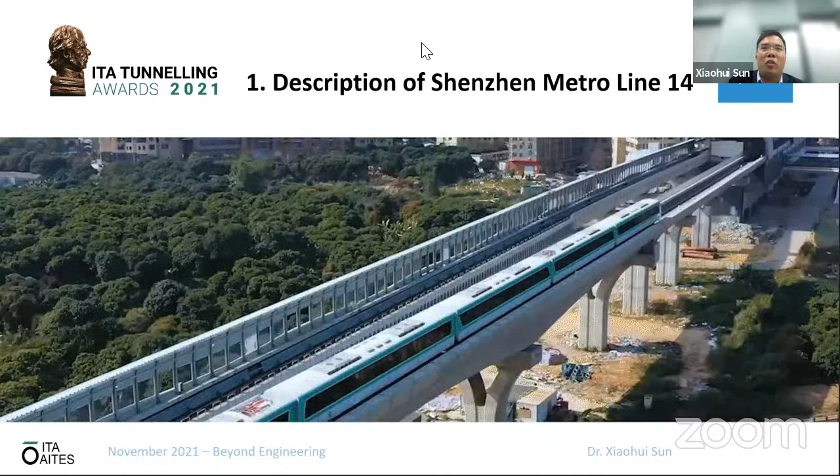First, I'm going to describe Shenzhen Metro Line 14 a little bit. The metro system has become an inevitable choice for megacities like Shenzhen because of its huge transportation capacity and the advantage of not occupying surface space. In recent years, more than 100 shield machines have been employed annually in Shenzhen.

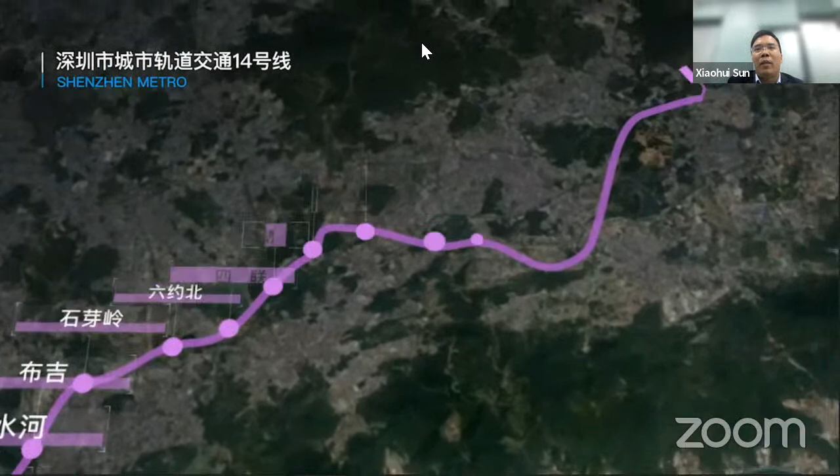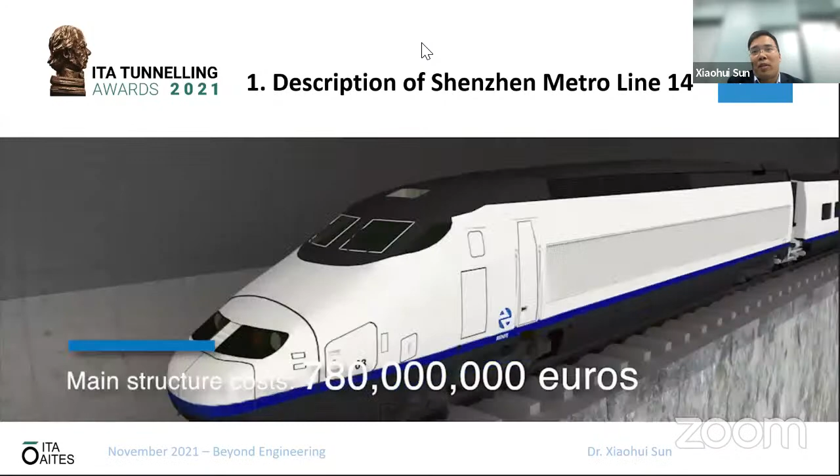Among the metro lines under construction, Shenzhen Metro Line 14, with a total length of 50 kilometers, is a benchmark project for green and low carbon construction in Shenzhen. In total, 49 shield machines have been used in the construction of the 88 kilometers of tunnel. New technologies have been put into use for green construction. Of course, shield spoil was processed by a novel treatment system, realizing volume reduction and resource utilization.

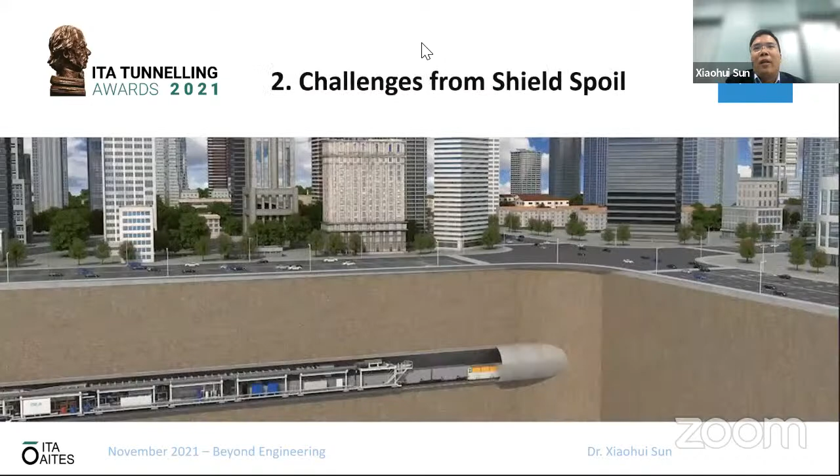And I'm going to show you the challenges from the shield spoil. So what is shield spoil? In shield tunneling, soil is cut and stirred by the shield machine, and by adding foam agent and water, it turns into shield spoil with very high moisture content and poor properties.

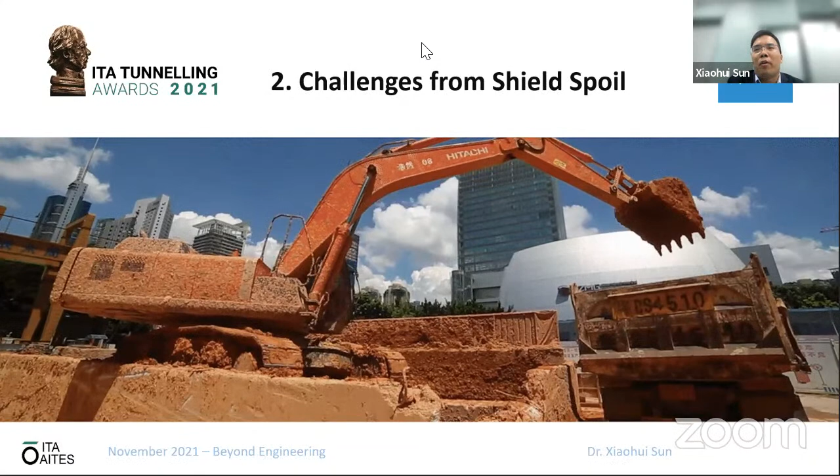The total amount of shield spoil generated in the construction of Metro Line 14 is estimated at 5 million cubic meters. In the past, shield spoil was transported by special vehicles for dumping. This traditional way not only occupies land resources, but also causes many problems, such as high cost, landslide risks, traffic jams, etc.

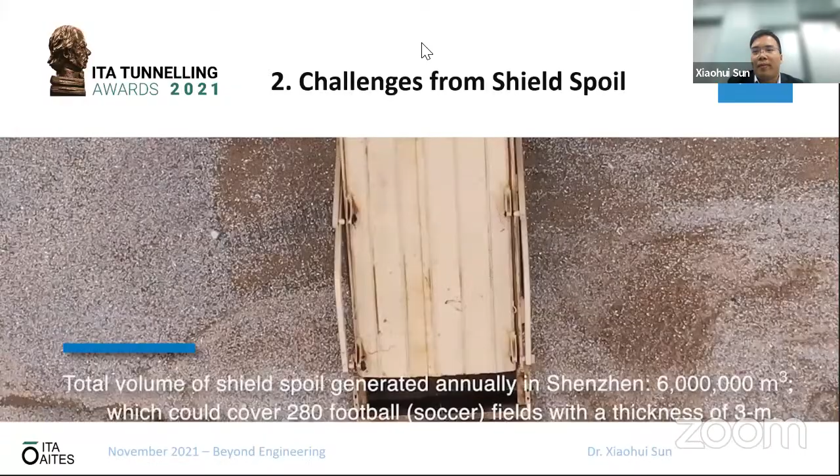Moreover, there's no more land in Shenzhen for dumping this shield spoil. On the other hand, shield spoil is mainly composed of gravel, sand, clay, and water, which are all valuable resources in engineering, and obviously dumping is a waste of natural resources. However, there are several major challenges in the resource utilization of shield spoil.

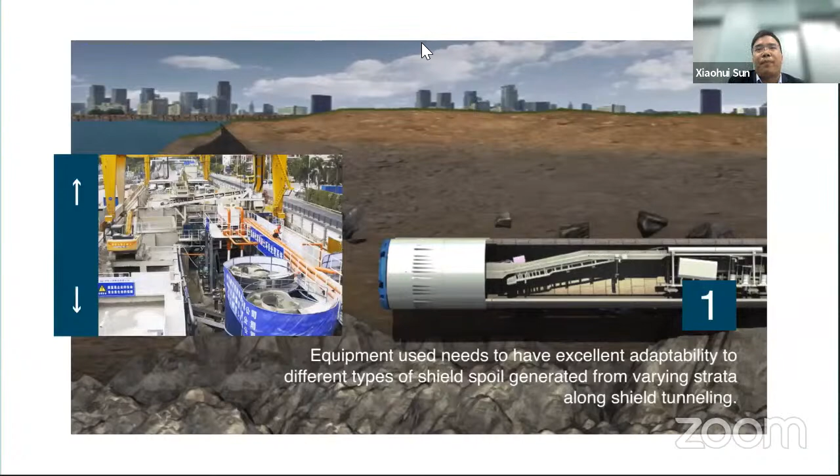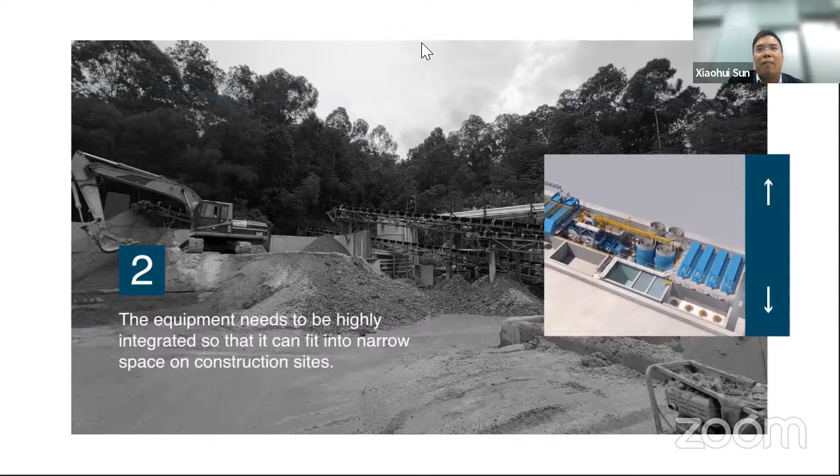First, the equipment needs to be adaptable to different types of shield spoil that come from different strata. Second, the equipment needs to be highly integrated so that it can fit into very narrow spaces in this megacity. Third, the equipment needs to be intelligent and advanced — the traditional control method requires a lot of manpower and is not very efficient. Therefore, we came up with a novel solution.

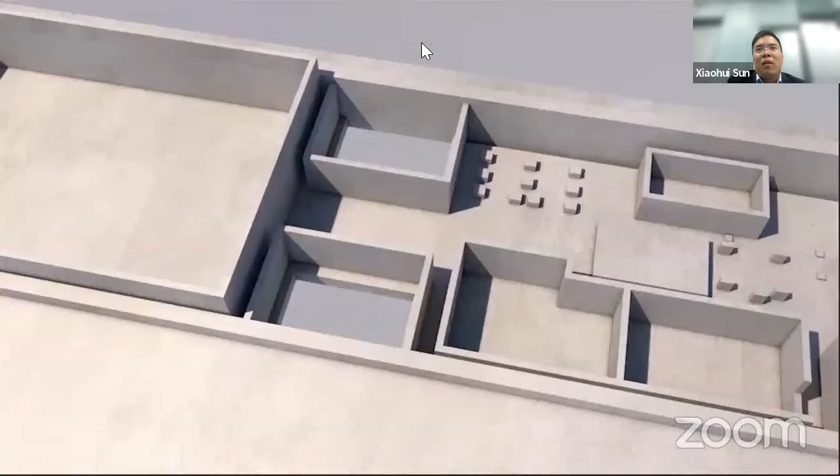An intelligent and modular system was developed and employed to overcome these challenges. This is a view of our system. It consists of 4 major modules, including a vibration sieve module, sand washing module, flocculation module, and filter press module, and an intelligent control system. As you can see, this is a 4-in-1 intelligent system.

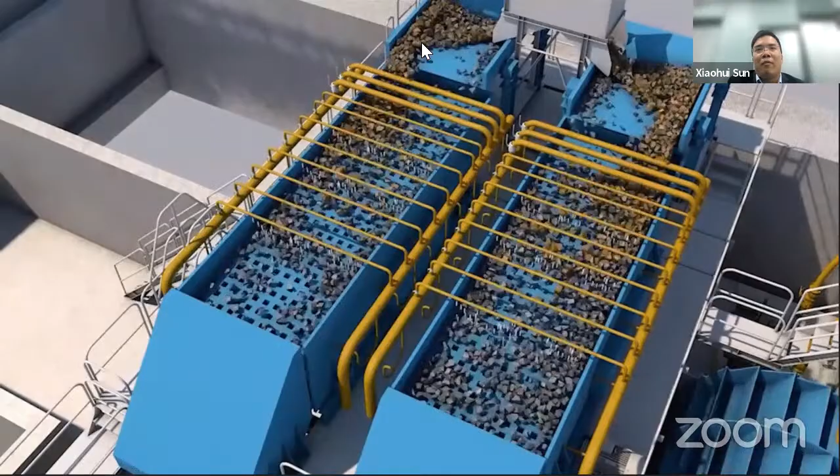In the equipment, the vibratory sieve module separates aggregates with a diameter larger than 2 millimeters from the shield spoil. The frequency of the vibration sieve and the pressure of the water flusher can be easily adjusted by the intelligent control system to ensure the capability of the equipment in treating different types of shield spoils.

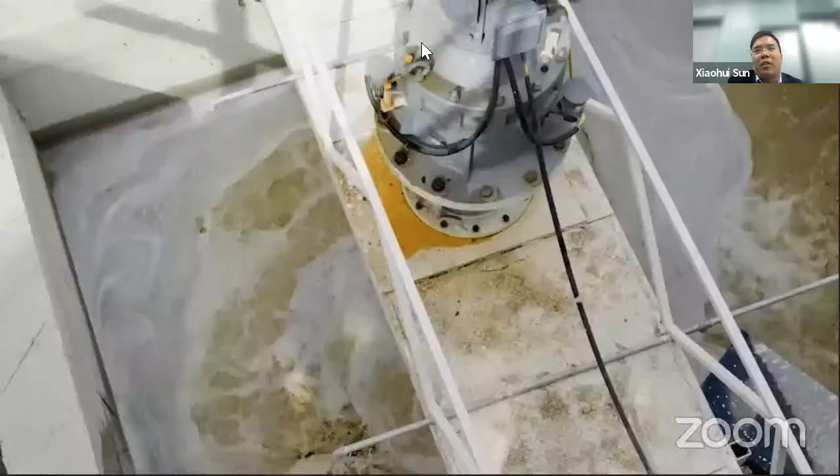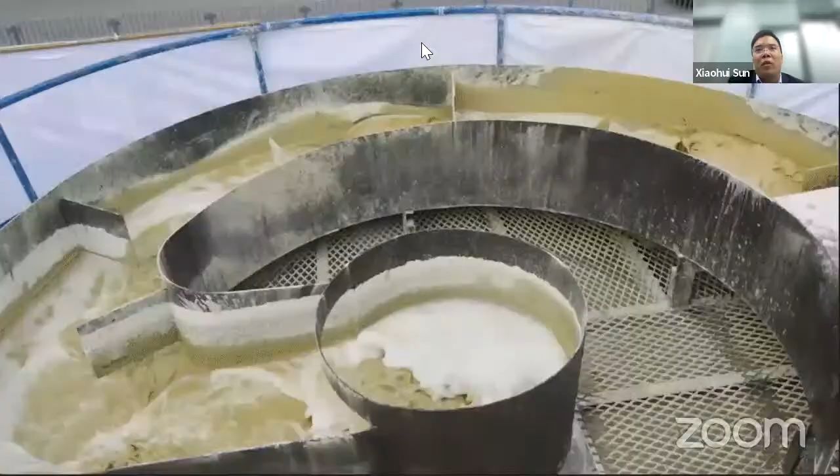The sand washing module recycles sand with a diameter ranging from 0.075 to 2 millimeters, and the flow rate of the hydrocyclone and the rotational speed of the sand washing system can also be adjusted by the intelligent control system. The specially designed flocculation module concentrates the slurry from the previous steps.

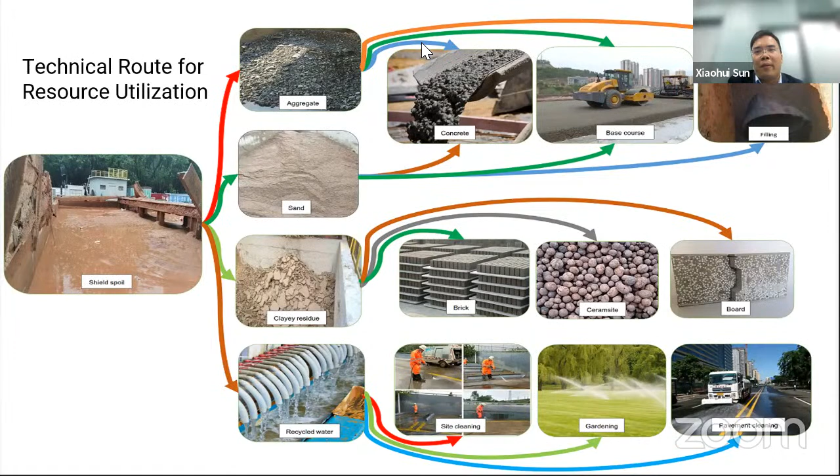In the treatment flow, 4 types of materials, including aggregate, sand, clay residue, and water, are recycled separately as products from the shield spoil. The technical route for the utilization of these 4 types of products has been well designed. Here I'm showing you their technical route.

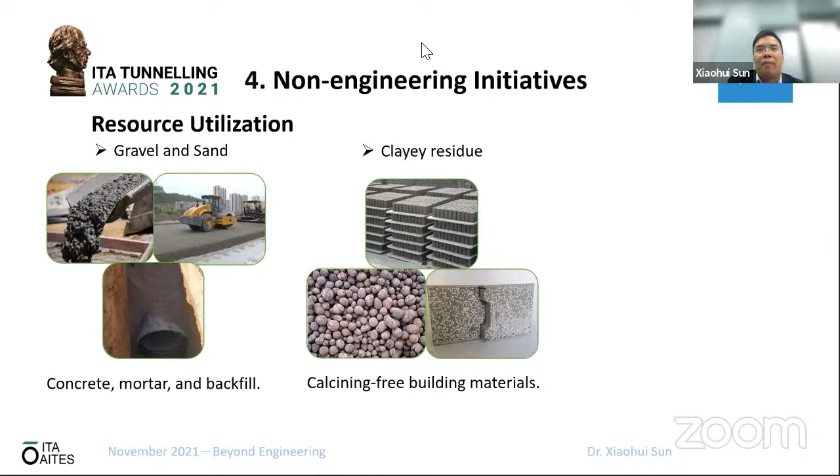The recycled coarse and fine aggregate can be used for making concrete, mortar, and backfill or grout, on-site or off-site. The clay residue is aggregate-free and can be used for making different types of building materials, such as blocks, bricks, and so on. The recycled water can be collected and used for site cleaning, vehicle cleaning, and gardening purposes.

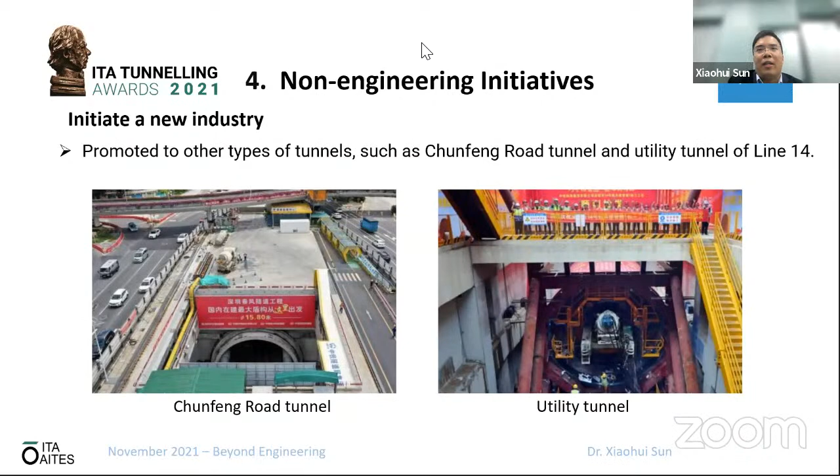This solution has also been used in other types of tunnels, such as road tunnels and utility tunnels in the city. A group of supporting technologies and guidelines for the smooth operation of the equipment have been developed. This effort lays a sound foundation for the rise of a new industry related to the treatment of shield spoil.

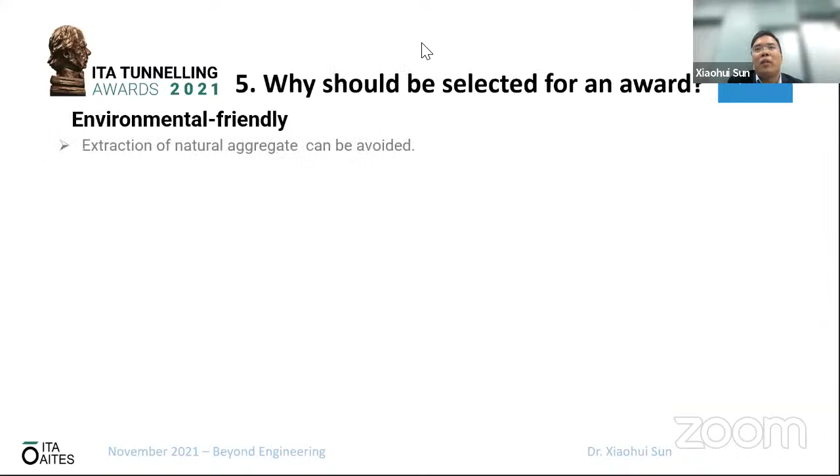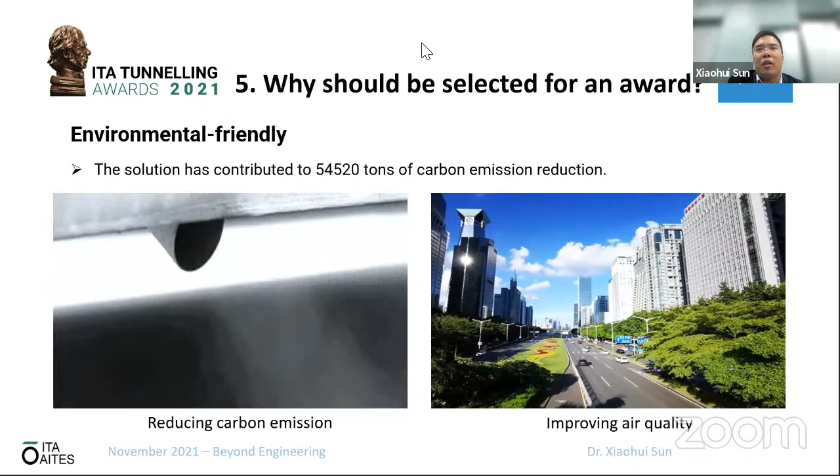Fifth, why should we be selected as an award? First, this solution has delivered an efficient, sustainable, and low carbon way of disposal of shield spoil. The extraction of recycled aggregate from the shield spoil significantly reduces the need for natural aggregate in construction. It also lowers the usage of traditional special vehicles, which substantially contributes to the reduction of energy consumption and carbon emission in the construction process of tunnels.

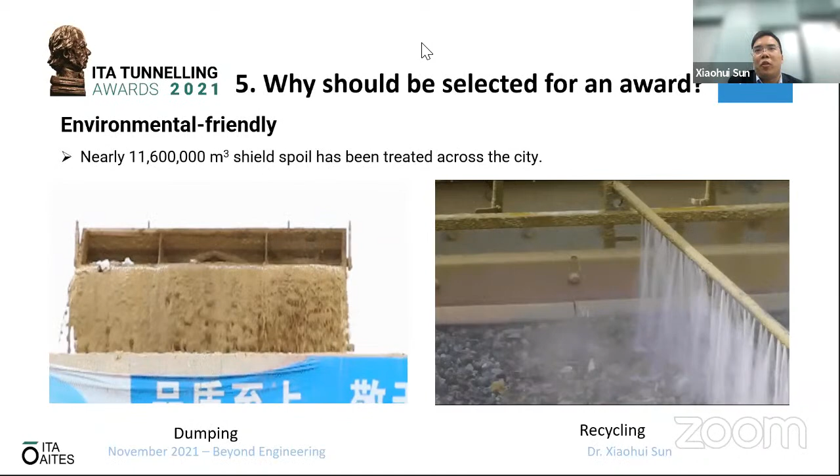This solution has contributed to 54,000 tons of carbon emission reduction and saved 1.93 square kilometers of land. The traditional way of disposing shield spoil has been changed profoundly in Shenzhen. Nearly 11.6 million cubic meters of shield spoil has been treated across the city, reducing half of the dumping volume and obtaining 4.6 million cubic meters of recycled aggregate and sand.

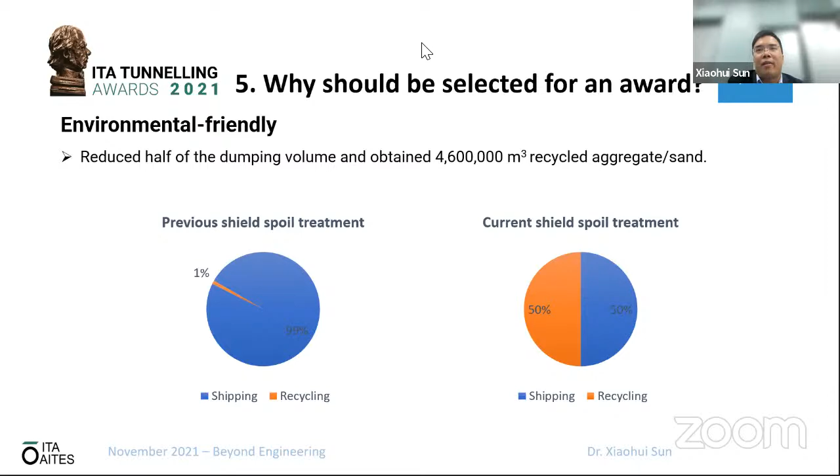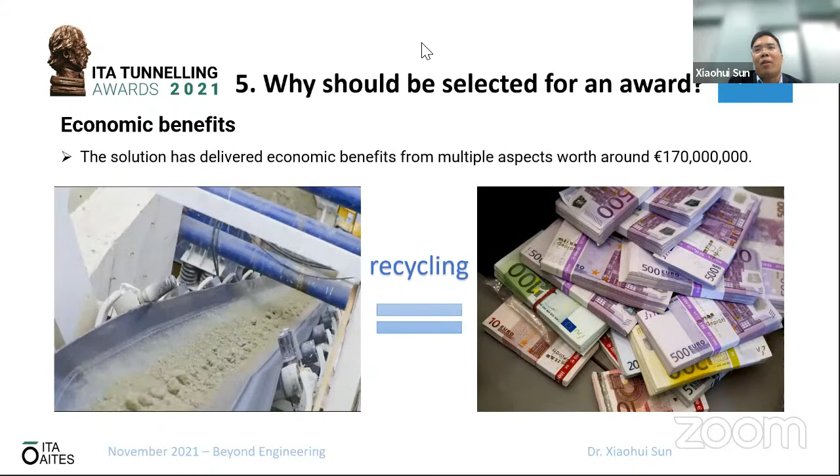The implementation of this solution also contributes to a total water conservation of 1.16 million tons. So overall, the solution has delivered economic benefits from multiple aspects, worth around 170 million euros. The outcome delivered by this solution has been welcomed by the clients and communities.

The chance of delay in construction schedule related to the shipping of shield spoil, which was very common before applying this solution, has been eliminated, and the project was completed on schedule. Also, using fewer special vehicles benefits the communities surrounding the metro construction site because of lower traffic pressure, reduced traffic noise, and higher air quality. So we produced a very good neighborhood environment.

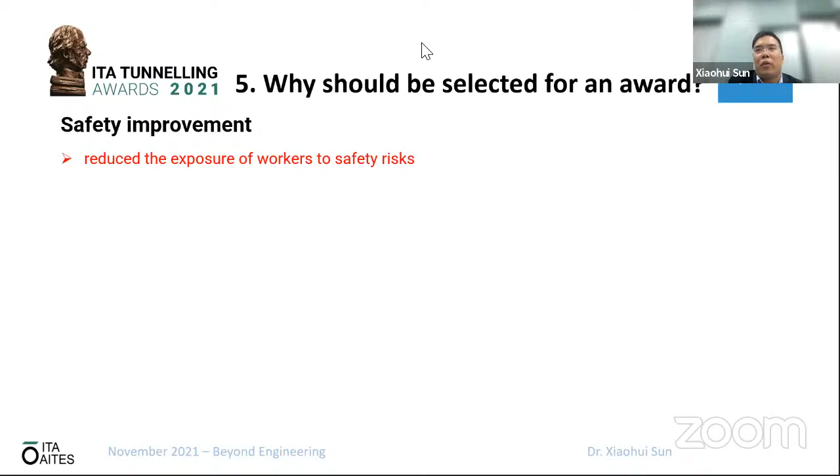In the construction of Shenzhen Metro Line 14, the application of this solution and other new technologies has reduced the exposure of workers to risks. For instance, innovative belt conveyor system, prefabricated components, intelligent control system, VR training system, and face recognition security system.

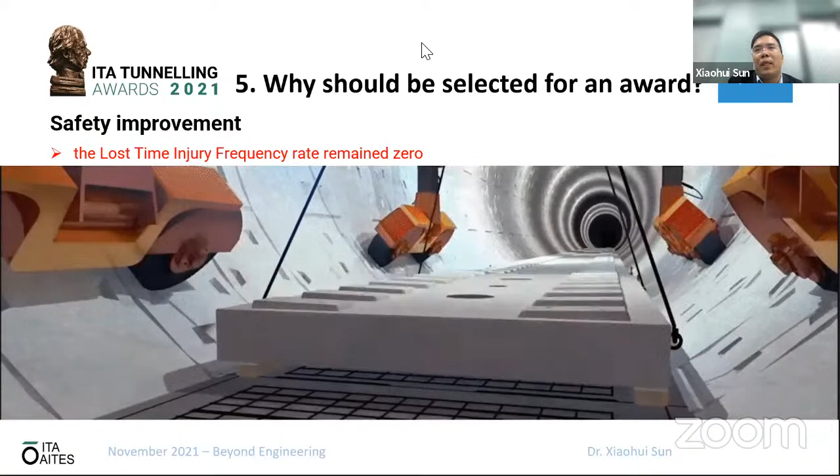Due to the implementation of all these technologies regarding safety improvement, the lost time injury frequency rate remained 0 during the whole duration of the construction.

Thank you for your attention. Here is all my presentation. Thank you.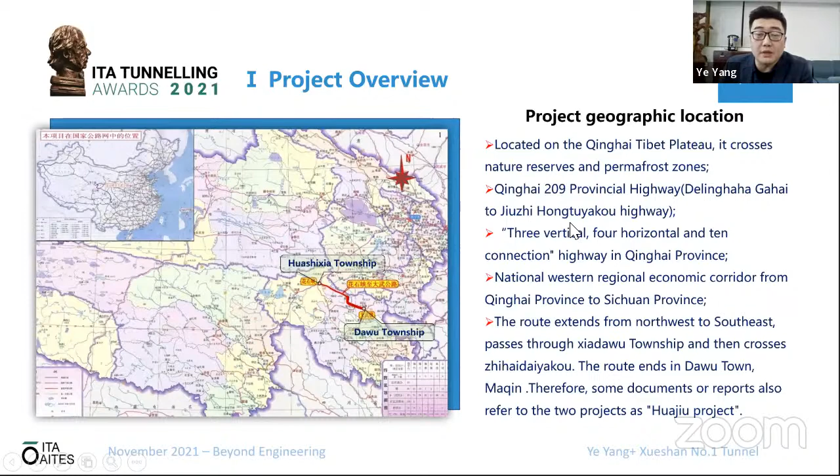The project is located on the hinterland of the Qinghai-Tibet Plateau. It crosses natural reserves and permafrost zones. The length of the tunnel: the left line is 4,570 meters, and the right line is 4,495 meters.

The Xueshan #1 tunnel crosses a mountain range with an altitude of 4,816 meters. This is some figures of the tunnel.

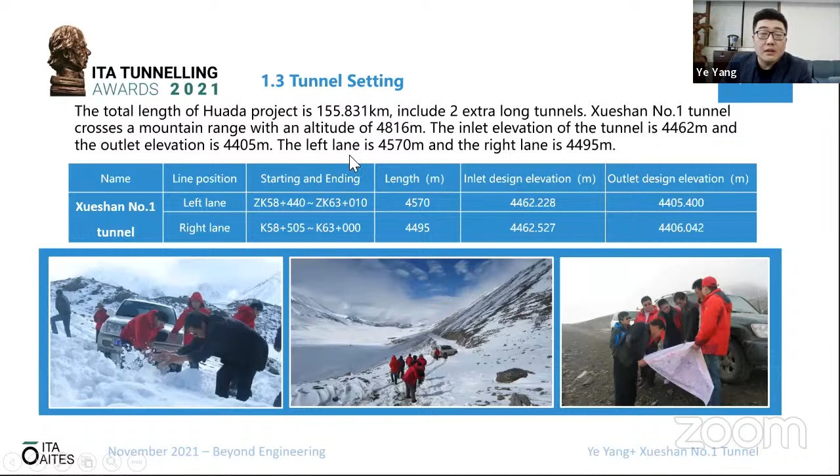The construction clearance width is about 10.25 meters, and the height is 5 meters. The emergency parking zone width is 13 meters and height is 5 meters.

Xueshan #1 tunnel is a tunnel in a high altitude, extreme cold area. For tunnels in this area, waterproofing is the fundamental goal of what we have achieved, and drainage and thermal insulation are the key points.

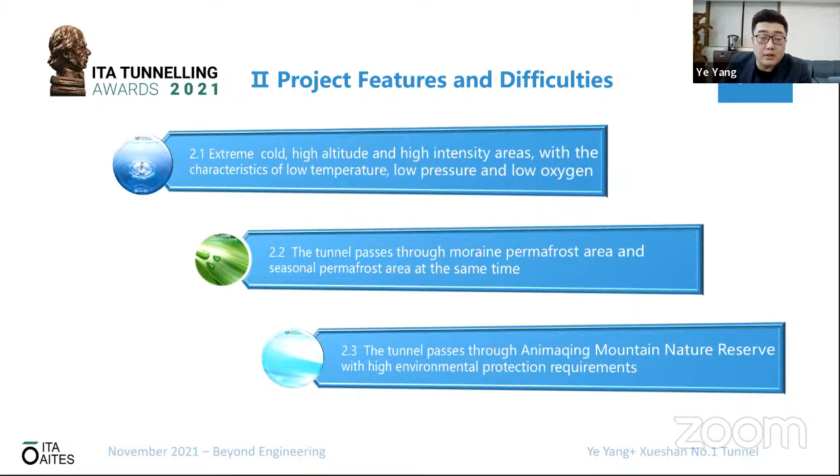The entrance section of Xueshan #1 tunnel is located in the permafrost area of moraine. The permafrost shall be protected during construction and after completion of the project. The annual average temperature in that area is below -4 degrees Celsius, and the extreme minimum temperature is -48 degrees Celsius, which is very distressing.

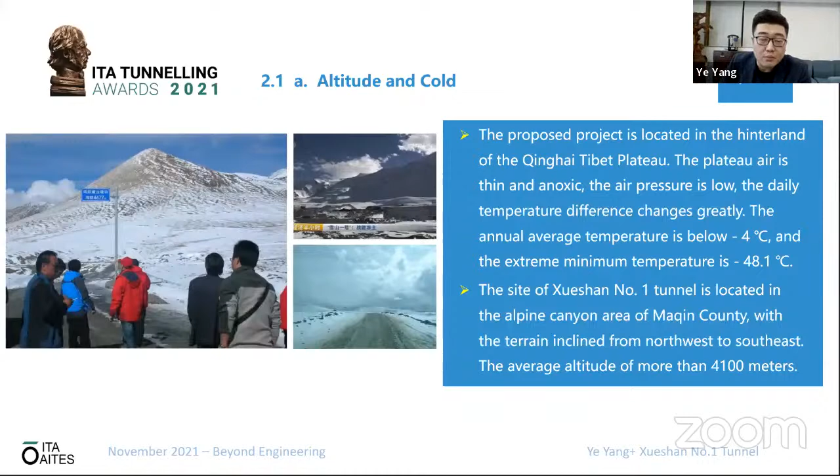The seismic activity in the area is relatively frequent, and earthquakes have occurred many times near the tunnel site.

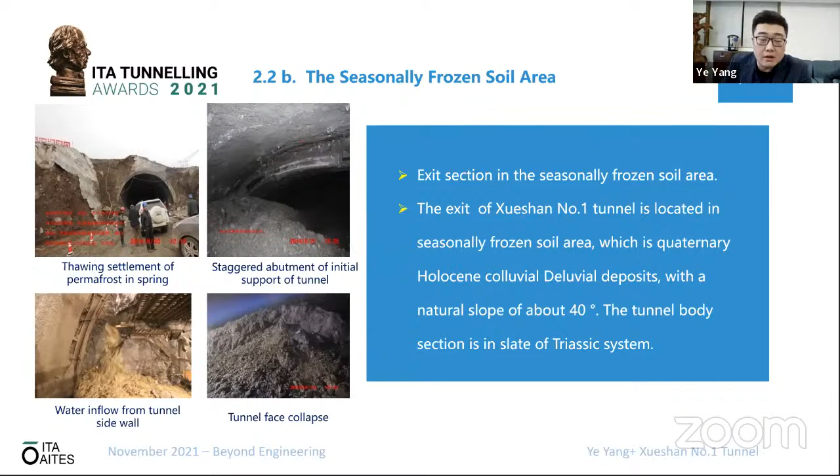According to the New Austrian Tunneling Method, the initial support structure of the tunnel is usually supported by anchor bolt, a reinforcement mesh, and shotcrete.

However, the primary task of building a tunnel in the permafrost layer of the moraine is to protect the frozen soil. The setting of system anchor bolts will damage the frozen soil, induce a deep thawing circle, and cause thawing settlement of the frozen soil. It is not conducive to the stability of surrounding rock, and therefore the system anchor bolts are cancelled in the design to strengthen support.

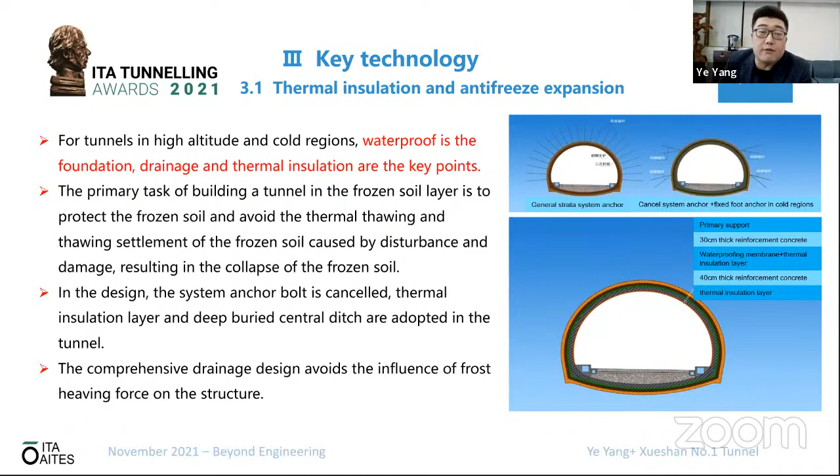In order to prevent the thawing settlement and frost heave of permafrost from affecting the safety of the tertiary lining structure, the tertiary lining structure shall be constructed after the secondary lining has completed at least one winter period.

The new lining structure design we have invented is the initial support without the system anchor rod, plus the secondary lining with the geotextile and waterproof board insulation layer, and then we add the tertiary lining without the insulation layer and the geotextile.

The waterproof and drainage design: the water must be controlled before freezing. The geotextile and the EVA waterproof board are used in the design. All construction joints and settlement joints shall be provided with embedded rubber water stops. High efficiency composite waterproof agent and additives shall be added to the lining concrete to improve the self-waterproof grade of the structure.

A 500 circular drainage pipe and deep buried central ditch, and the new cold-proof water release tunnel are formed to ensure the seepage water of surrounding rock can be discharged smoothly into the tunnel.

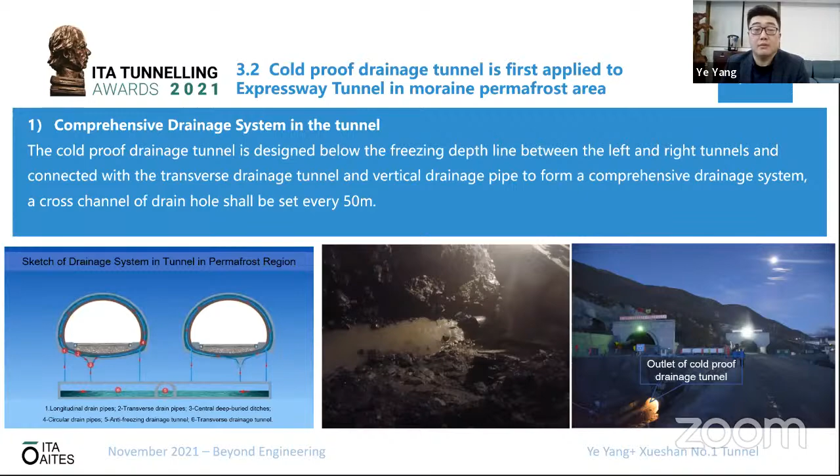Combined with the topography of the tunnel entrance within 500 meters of the permafrost entrance section of the moraine, the cold-proof drainage tunnel is set below the freezing depth line between the left and right tunnels, connected with the transverse drainage tunnel and the vertical drainage pipe to form a comprehensive drainage system. After 3 years of operation, the cold-proof drainage tunnel has strong comprehensive drainage capacity.

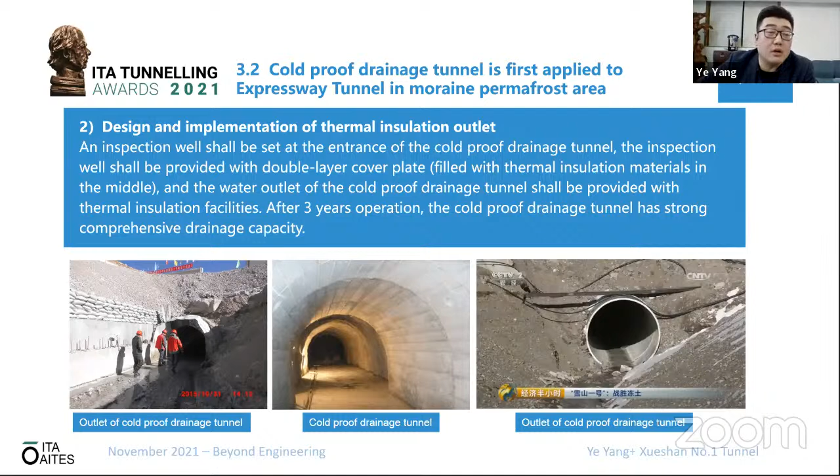The highway tunnel design standard specifies that the setting spacing of pedestrian cross passages should be 250 meters, not more than 350 meters. In case of fire in an ultra high altitude tunnel, personnel with altitude reaction, if feeling nauseous or having a headache in the tunnel, shall be transferred to the adjacent tunnel through the nearest cross passage. Therefore, the reasonable cross passage spacing is the most effective measure to strive for escape time.

The fire model adopts a rapid development fire model. Detection points are arranged every 25 meters along the whole length of the tunnel to monitor parameters such as the temperature and visibility in the tunnel.

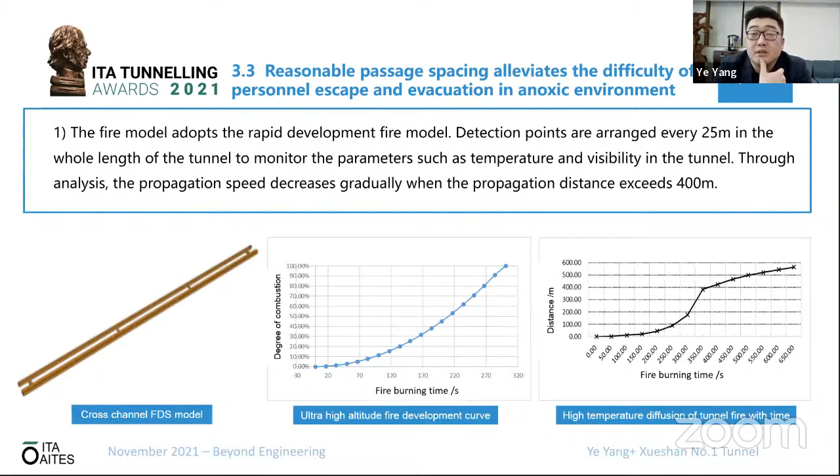The tunnel adopts automatic stepless dimming control technology to achieve on-demand lighting according to the time, speed, traffic volume, and other information, so as to save lighting power under the condition of driving safety. It also improves the insulation and capacity reduction technology of tunnel electrical switchgear, transformers and other equipment.

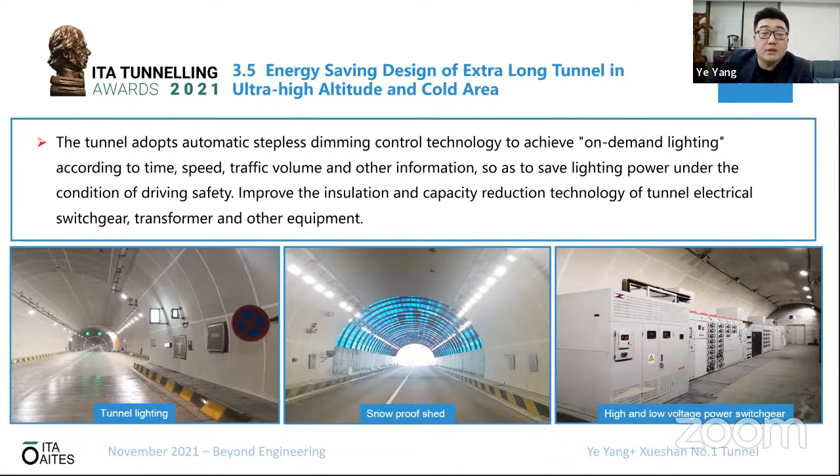The heat preservation control technology is used in the tunnel, and we use a heating device at the tunnel portal, with spacing controlled at 6 meters, which can ensure the shed temperature reaches 5 degrees Celsius required by construction. If the temperature is too low, the concrete will peel off from the shed, and that's why we make the temperature reach 5 degrees Celsius.

No safety accidents occurred in the whole construction process of Xueshan No. 1 tunnel, and zero casualties were achieved in the construction of this super long tunnel in ultra high altitude and extreme cold area.

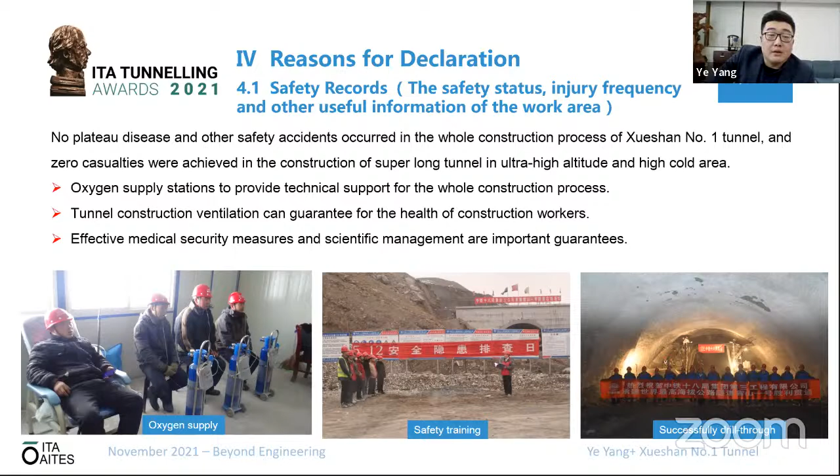It is an important part of the planned National Western Regional Economic Corridor. It has very important practical and historical significance for promoting the economic development of Qinghai province and improving regional traffic conditions. The driving time was shortened by nearly 5 hours.

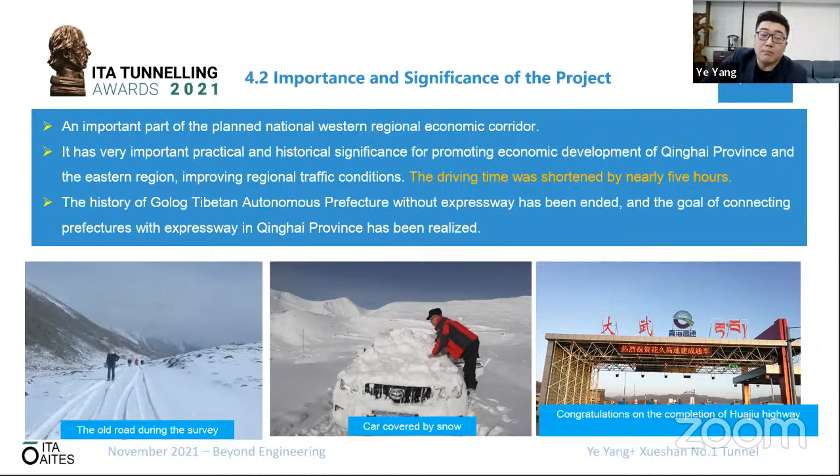The entry should be selected for an award after many scheme demonstrations and technical innovations. Many technical problems of tunnel construction in moraine permafrost, ultra high altitude and cold areas have been successfully solved, which provides a good reference for similar projects in the future.

And the new lining structure, canceling the primary support of system anchor bolt plus the primary framework lining, and then the secondary lining and the tertiary lining, is designed for permafrost surrounding rock, which can make the stability of the rock more stable. And the new cold-proof drainage tunnel suitable for tunnels in the permafrost area is invented.

Here are some rewards and the prize of provincial and ministerial excellent design award.

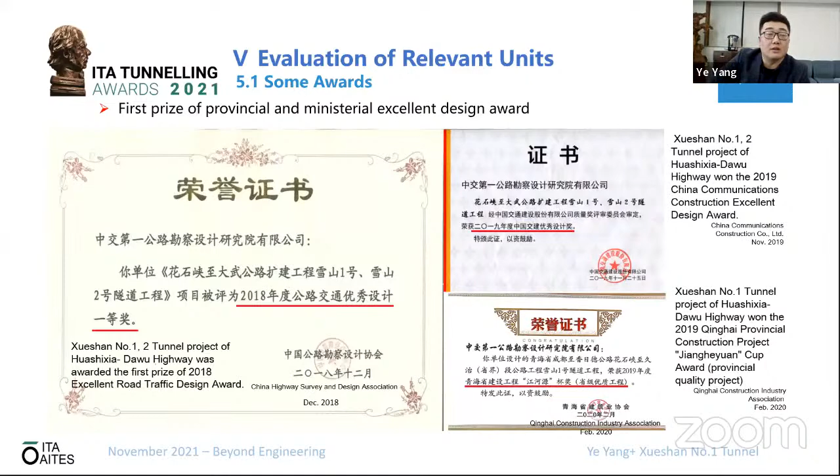In September and October 2016, CCTV's news broadcast and news studio reported the Xueshan No. 1 tunnel was...

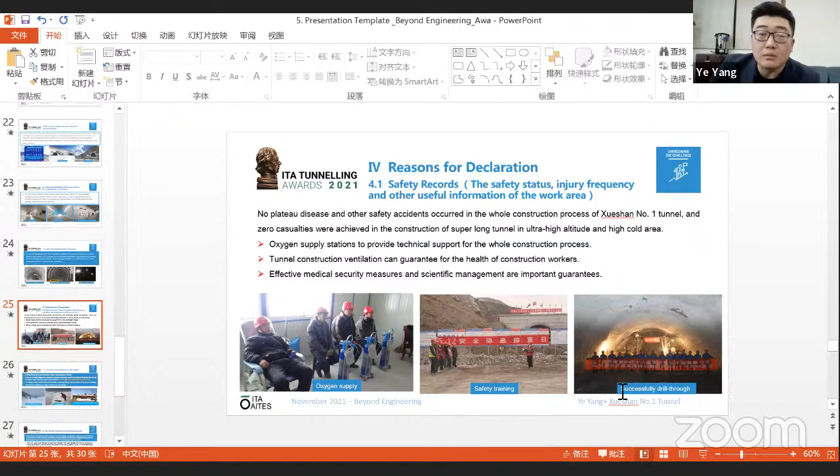Sorry, yep. Sorry, I made a mistake because I don't see any longer what I should. Okay. Yes. Can you just add it as a full screen? Yeah, of course, yeah.

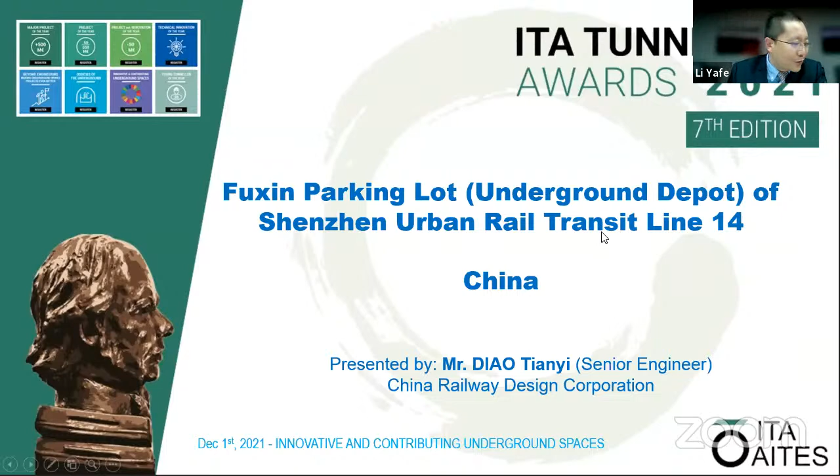Let's go. Can I start? Yeah, okay. Hi, everyone. We are representing the China Railway Design Corporation today to make a presentation of Fuxin Underground Depot of Shenzhen Urban Rail Transit Line number 14, which is actually from the same line Mr. Ye Yang shared with everybody else. My presentation includes 3 parts.

Number 1 is the project profile. Mr. Yang, Mr. Xiaohui, has already shared some of the information with you, which saves us some time. Part number 2 is about the challenges and countermeasures of our project. Number 3 is the conclusion.

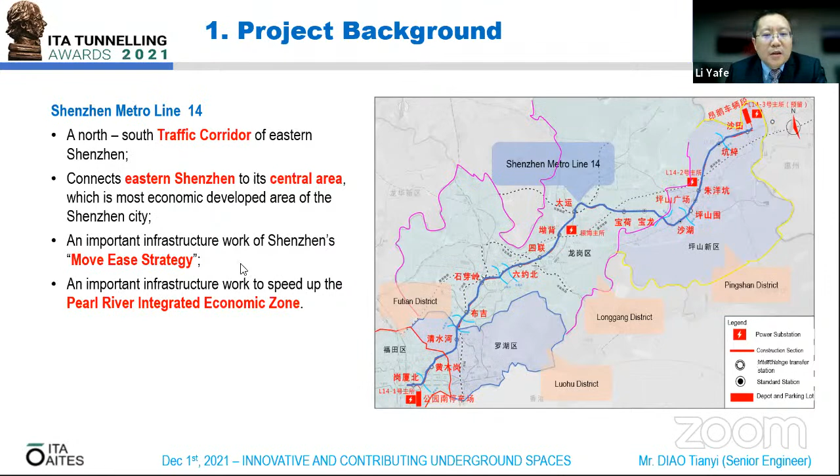Let's go to number 1, the project profile. Shenzhen Metro number 14, which Mr. Xiaohui has already shared information about, is a north to south traffic corridor for the eastern south Shenzhen, connecting eastern Shenzhen to the central area, which is the most economically developed area of Shenzhen city. It's also part of the Move East strategy of Shenzhen, and shares part of the Pearl River Integrated Economic Zone to speed up development of this integrated zone.

Our project is located here in the south part of the whole line, which is the underground depot of this line. The location is for the interchange of metro line 14 and 11. It's under the Central Park of Shenzhen, which is a very important location in Shenzhen.

The quantity of this work is a pit with width of 173 meters, length almost 1,000 meters, and we have an earthwork excavation of 1,540,000 cubic meters, which is quite large.

For the supporting system, we used bored piles plus a concrete roof slab for support. The main structure is a box structure built by top-down methods, with a typical section of 16 spans using reinforced concrete frame structures. The main shareholders: the client is Shenzhen Metro Group, we are the designer, China Railway Design Corporation, and the contractor is China Railway Tunnel Group. We have a supervisor, China Railway Siyuan Engineering Corporation.

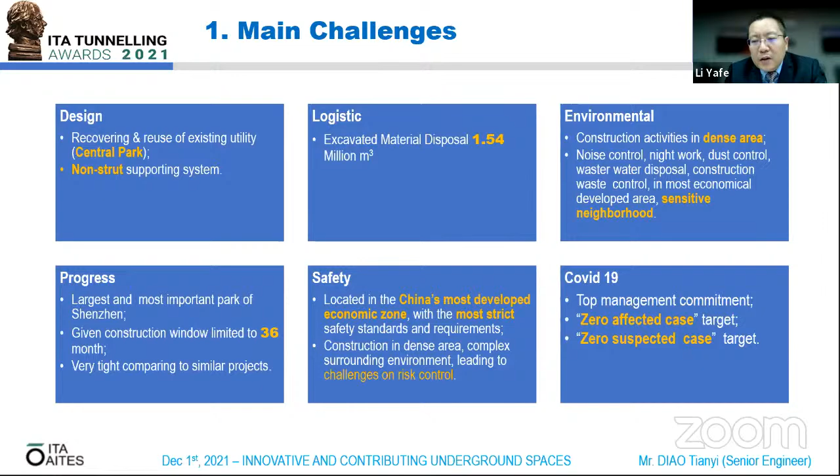For safety, we are located in China's most developed economic zone with the strictest safety standards and requirements. There are a lot of challenges for risk control on this project. We also have the challenge from COVID-19, and we have a commitment from our top management to have 0 affected cases and 0 suspected cases as the target.

Number 2, for the supporting system.

For the traditional supporting system, we use bored piles or diaphragm walls plus concrete strutting. But in this project, we have a new design which we call non-strut support. We use the bored piles as a wall, and then from the surface, we use the roof slab as another support to ensure the stability of this structure. In the underground works, we have this king post. So in total for this project, the non-strut design saved a lot of works.

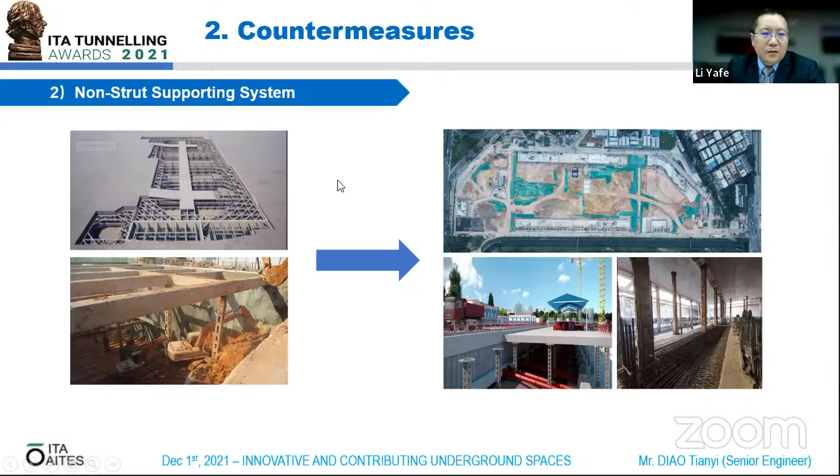Of course, we have less construction waste. Number 3, reuse of the excavated material. For this project, the excavation consists of 15% completely and intermediately weathered sandstones, 27% clay, 32% sand, and 23% pebble soil.

So we made the clay into bricks, which Mr. Xiaohui also shared with you. For the silty fine sand and other sands, we screened this and made it into shotcrete to reduce this kind of material. For the sandstones, we crushed these stones and put them into temporary concrete material. And for the pebble soil, we make it into backfill. By this way, we saved 70% of the total excavated material.

We reduced the disposal of material from 1.5 million cubic meters to 0.4 million cubic meters, which saved us a lot of time and cost. By the way, we also reuse the dismantled concrete. We crush this concrete into small stones and reuse it to make new concrete for temporary works.

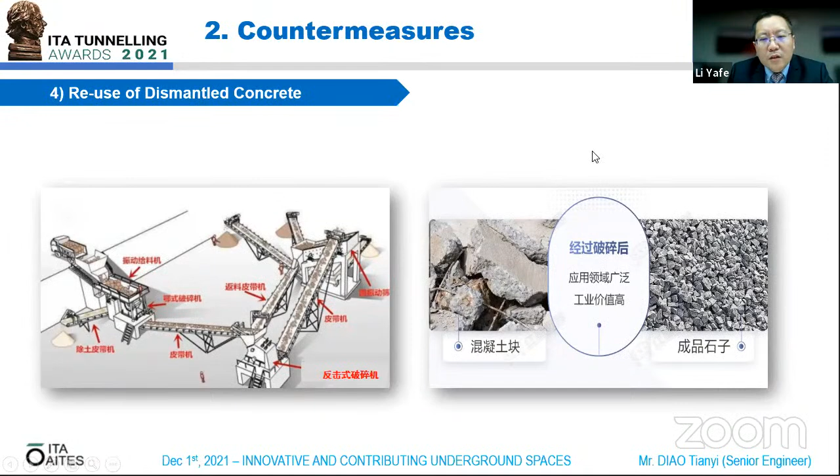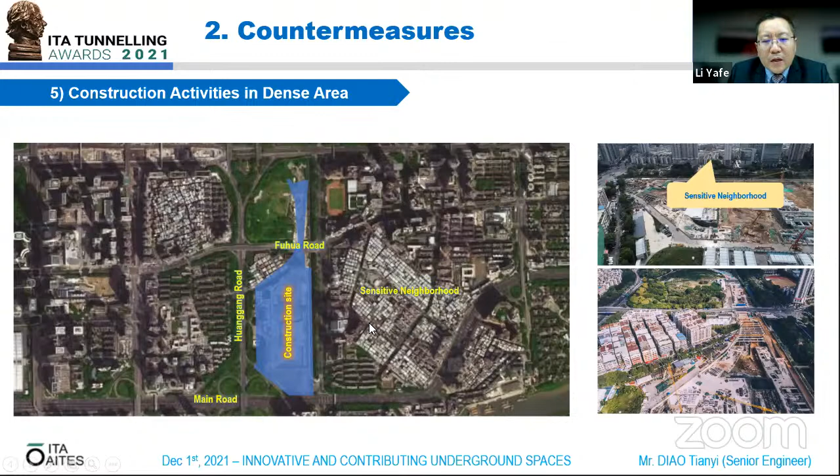Number 5, construction activity in the dense area. So we have to be very environmentally friendly and also community friendly. We are located in a very busy area of Shenzhen, with very important neighborhoods, the most expensive land and persons located here. We have to take very good care of them, so we use new technologies like drones to monitor environmental factors.

We have an integrated environmental monitoring station to monitor dust, PM 2.5, and PM 10 levels. When the alert level is reached, we have a spray system that automatically starts to spray water so we can control the dust. Also, we use a big data center to share real-time information with all authorized users for this project, and we have applied new materials and new equipment to ensure environmental protection.

For example, for the roughening of the concrete joints, we use a new agent that is mixed and sprayed before we cast the concrete. After casting, we use jet shooting to clean this roof, which cleans the surface and roughens it. By this way, we save a lot of time and also reduce the noise.

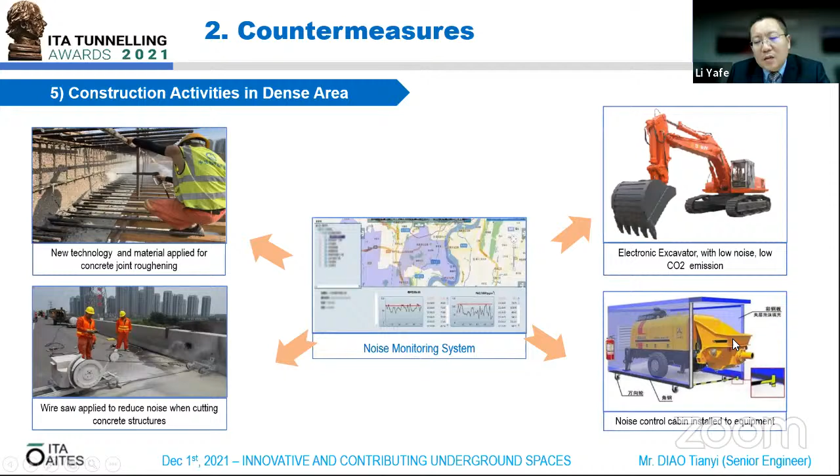Another way is how to cut the concrete using a wire saw. We also apply electronic excavators with low noise and low CO2 emission. For noise control, we put a noise control cabin for each piece of equipment with vibration to reduce the noise.

Of course, BIM technology was also applied in this project for progress control and demonstration of conflicts. And in the fight with COVID-19, we have vaccination for everybody free of charge, and nucleic acid tests every 7 day period, also free of charge.

We have face recognition entry control on our site. We disinfect the working area and office area daily. For entry to the sites, this is widely applied in China—we have this passport, showing the green card to pass.

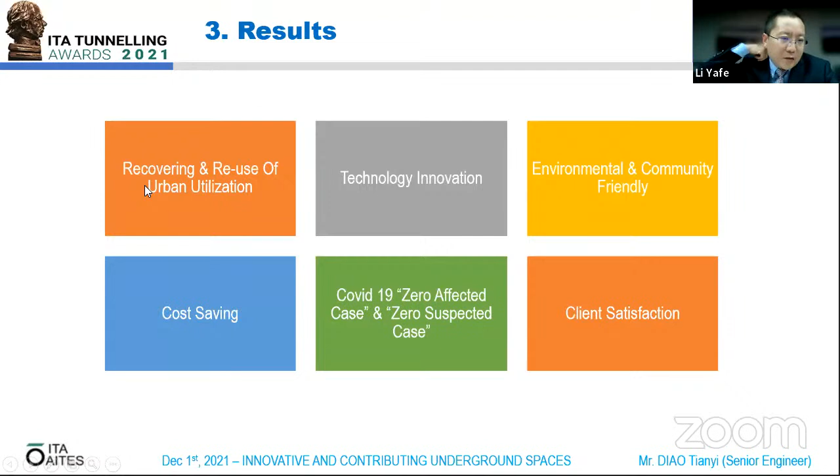As a result, for this project we have some achievements: recovering and reuse of existing urban utilities, technology innovation, environmental and community-friendly outcomes. We save the cost, we reach the targets of 0 affected cases and zero suspected cases for COVID-19, and we also have client satisfaction.

As a conclusion, why should we be selected for the award? We have had and practiced new concepts. First, the project should go smart. The architectural design and the artist design should be integrated with the engineering design.

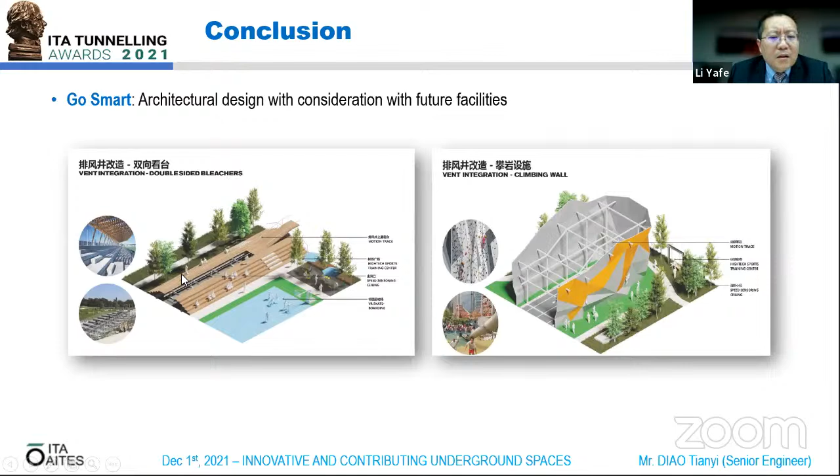For this project, this is a demonstration of future project ventilation—we make it double sided. These sporting areas, and this depot also goes underground, which was quite new innovation, because to our knowledge, most depots are on the surface.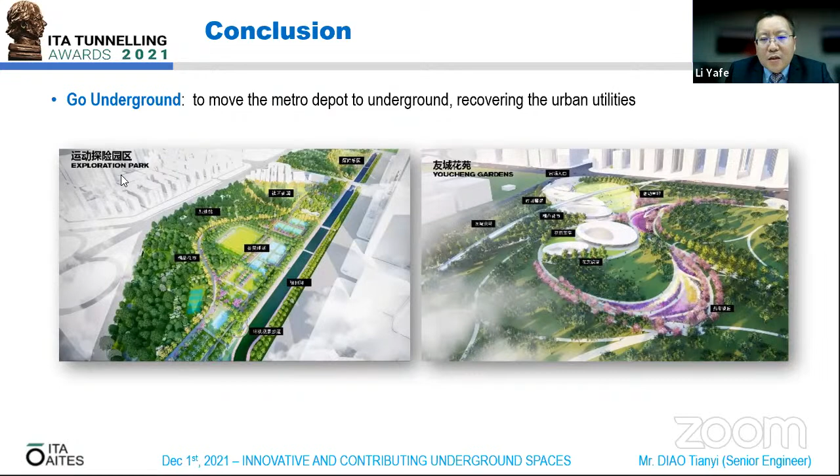Yeah, so we believe that this project is a good practice and a good example for future projects.

And for the execution of these projects, we have the concept of go green. For example, for the excavated materials, we not only saved time and cost, but also reused this material, which is environmentally friendly. We also applied electronic vehicles to replace the traditional vehicles which consume petrol.

And go friendly, we applied a lot of new technology to make sure that we are protecting the interests of the neighborhood, the community, the client, and all the stakeholders. So this is our presentation. Thank you.

Thank you very much for this interesting presentation and the new aspects of line 14 in Shenzhen. As you know, the ITA World Tunnel Congress in 2024 will be in Shenzhen. So yeah, we are very interested by all you are building there, because that will be sites that we will be able to visit, and I'm sure there will be other ones when we are there in 2024.

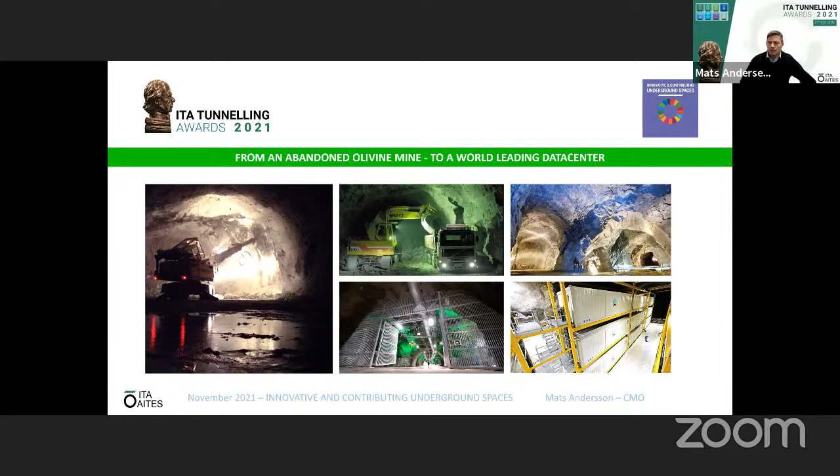The stakeholders of our project are very committed owners: Columbia Threadneedle, Green Infrastructure Fund, and Rittal, a global data center infrastructure provider. They're heavily committed to enabling green solutions for this digital transformation we're going through, and saw Norway and Lefdal Mine Data Center as a unique opportunity.

When it comes to the mining, Sibelco was owning the mine when the operations were ongoing, and we used them, and later Sintef, for the project when we started the transformation process. We have used mainly regional suppliers for the construction, but also global suppliers for the data center operation itself.

Today we have large data center clients in our facility, international, mostly from Germany. And this week we announced a new contract where Daimler, Mercedes, is moving their HPC cluster, a large data center contract, to our facility to go green and reduce their carbon footprint globally.

The background of the project is that Lefdal Mine is one of the largest olivine mines in the world. It was processed from the 70s until 2009, almost 40 years. The group of people behind the mining process and a local IT company saw the idea of green mineral out and green IT in. Olivine is a green mineral, and green IT is the future.

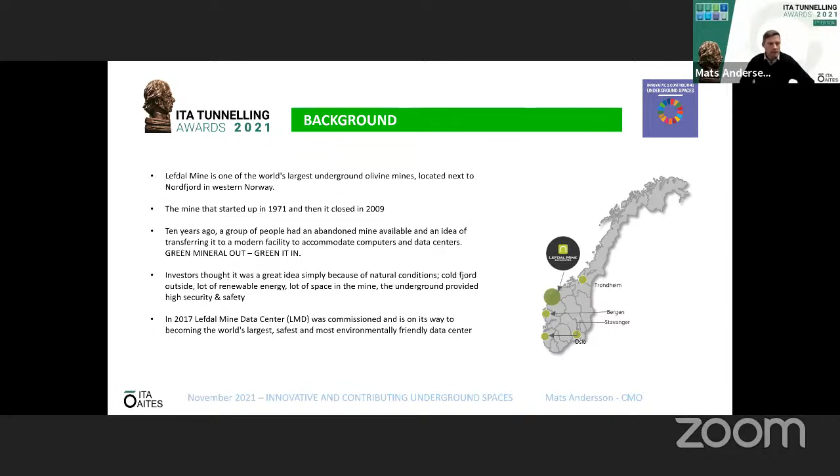The mine is some 500 meters long, 350 meters wide, and 150 meters deep. It was operated using a room and pillar method, mostly horizontal drilling with little damage to the surrounding rock. During the mining process we had severe securing by scaling and rock bolting. But one of the first things we had to do when we went in to transform this mine was to upgrade that.

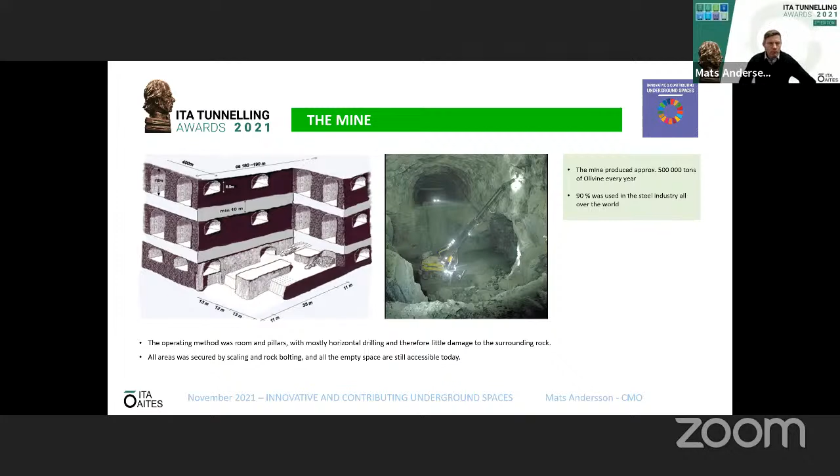The transformation process took about 18 months, and we started by having inspections of geologists from SINTEF in Norway. The most prominent geologists in Norway went through the entire area that we're going to use, giving us a report on what we needed to do to secure it so that we had a fully functional space for both personnel, but also protecting the data center equipment.

One of the first things we had to look into was how to use the cooling system that we intended to use. The mine is located next to a deep fjord, 500 meters deep, and we bring the water down into the mine to heat exchangers. So the infrastructure for this was key for us to enable the usage of this data hall.

Once that was in place, the mine itself is a raw building. Compared to building a data center on top of the ground, you will need to build the building, but the raw building is already in place, which means we have to spend less materials in building the data center than if we build a traditional data center, which is a huge benefit both on the investment side and on the sustainability side.

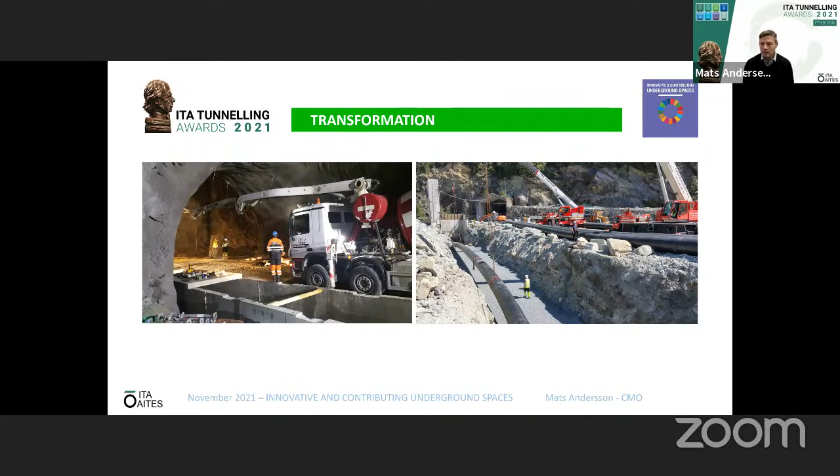The server parks or the IT infrastructure require a lot of power. We also have roughly an identical amount of power needed to cool the IT infrastructure. By using the cold fjord water as a cooling medium, we are able to use only 5% power on top of the IT power for cooling, meaning it's a highly efficient cooling system. So not only do we run on 100% renewable power, but we also use very little of it, enabling the power to be used elsewhere in society.

Here we see some pictures from the initial build out. On the right, we see the ducts for the cooling system A and B. We did some rock bolting and concrete to secure the areas. The entire data center is built with resilience, so it's a redundant system with every single infrastructure being in A and B, so that you can have concurrent maintainable infrastructure, and for us in the data center industry, deliver a highly secure and uptime infrastructure for our customers.

The entire design and concept of our data center is modular. We build out infrastructure, we build out caverns, we build out customer deployments in a modular way so that we add capacity as the data center is increasing capacity. We start by level 3, we continue on level 2 and 4. We start with single areas in the mine and develop. The backbone of the infrastructure is built to cater for the entire facility, but the last mile infrastructure is built to cater for the individual modular build out.

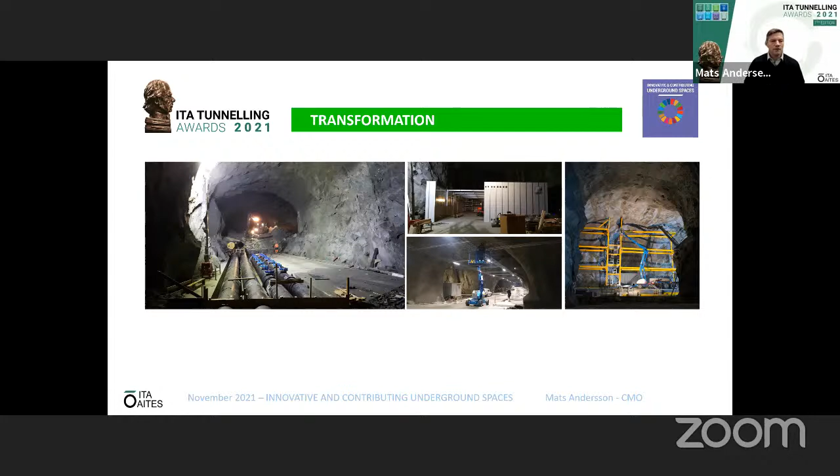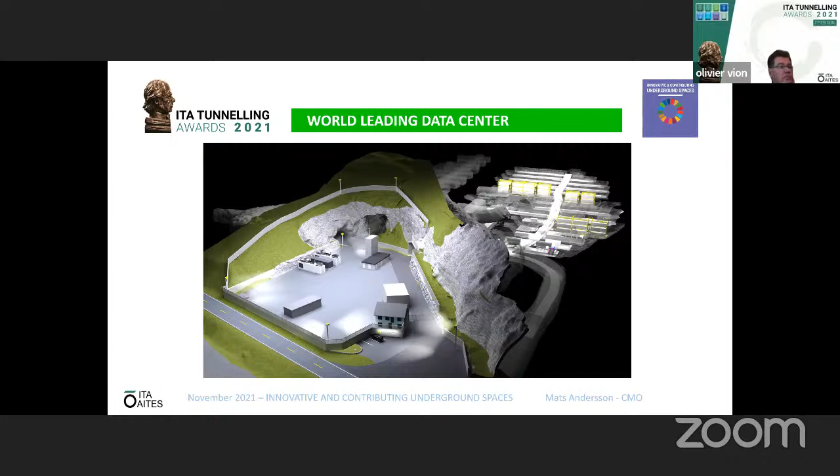To be able to use the mine, it was important that we made some small changes on the outside. This is an actual picture from the area where we needed to adapt the entry area so that we could install office space, needed infrastructure, and also for security purposes. Here we see a CAD picture of how it's connected with the entrance on the outside, and level 3, then on the back of the picture where you have five levels of the mountain hall structure.

We're also having natural EMP protection for our customers, which is important. So everything has thermal surveillance, motion detectors, an access control system, CCTV, security. We have staff 24/7 protecting these areas.

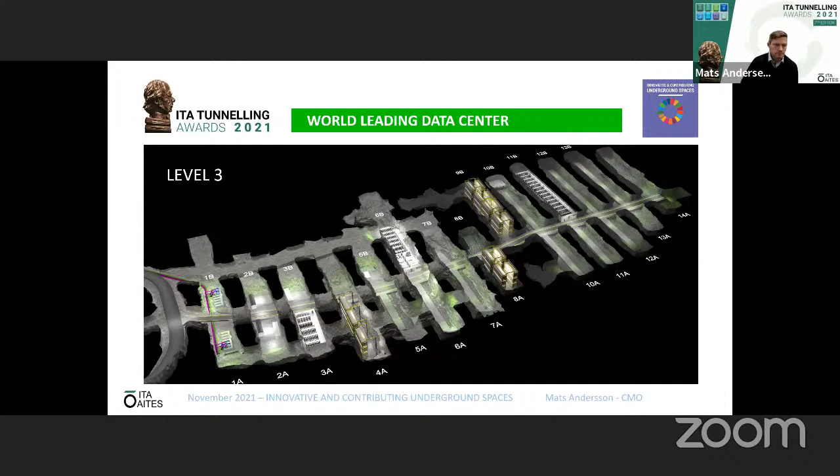The different solutions we use to house our customers is either data halls. These are room-in-room solutions, so you use an infrastructure that you normally use when you build a room inside an existing building, so it's limited materials. We build a space where we then bring in our infrastructure, which is power, network, cooling, under our raised floor, where we then equip these areas with data center infrastructure. So data halls is one way of doing it.

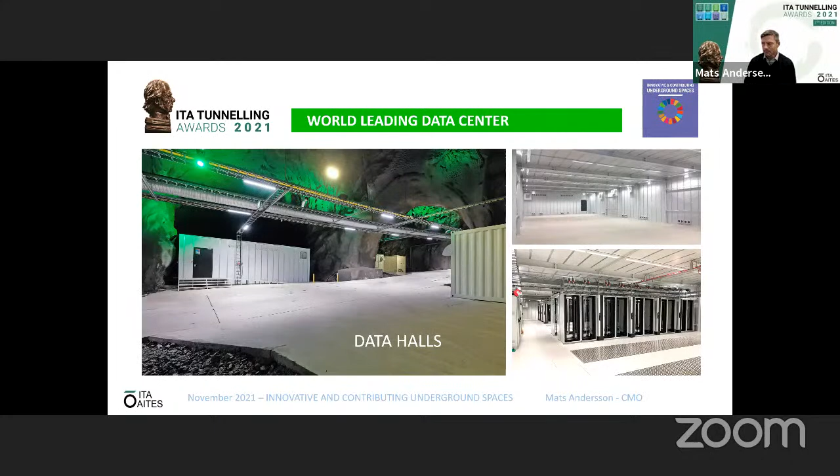The other one is containers, 40 feet IT containers. The mine itself has a logistical system which is superb for doing what we are doing. And with the high roof height we have in our areas, we can then stack 3 containers on top of each other. Inside these containers, you have servers and clients running high performance computing or data storage.

And mostly, as I said, the clients are from Germany. Going quickly to why we should win the award.

Obviously, we are a big fan of reusing old mines naturally, since we have gone into this project. This is giving new life to a large area that would have been empty if we didn't do that. At our Mine Data Center, every year we are contacted by other companies around the world, and we have multiple companies coming to look at how we have built the data center inside the mountain hall, or a mine. This is something that we happily share, our technology, our method, and we know that other companies have done similar things in China, Israel, and also Sweden because of our project.

So we're very proud of that, reusing an old mine. Secondly, we are generating jobs in an area of Norway where there's limited industrial expansion. We have created more jobs already than the mining process itself did when it was running. But this is just a start. This is an industrial adventure which will create many times as many jobs as previously.

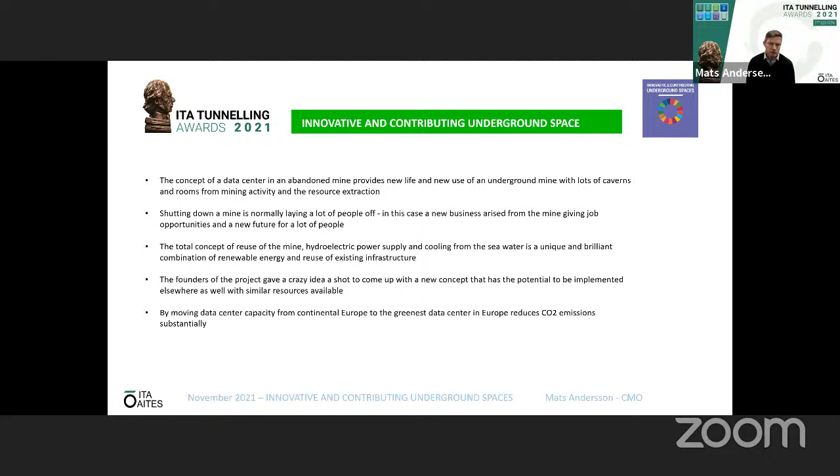I think we had a somewhat crazy idea some 10 years ago. We did manage to get that across to the initial risk takers. And I think we have made way for many other interesting parties who want to do something similar in the rest of the world. And the journey has just started. So thank you so much.

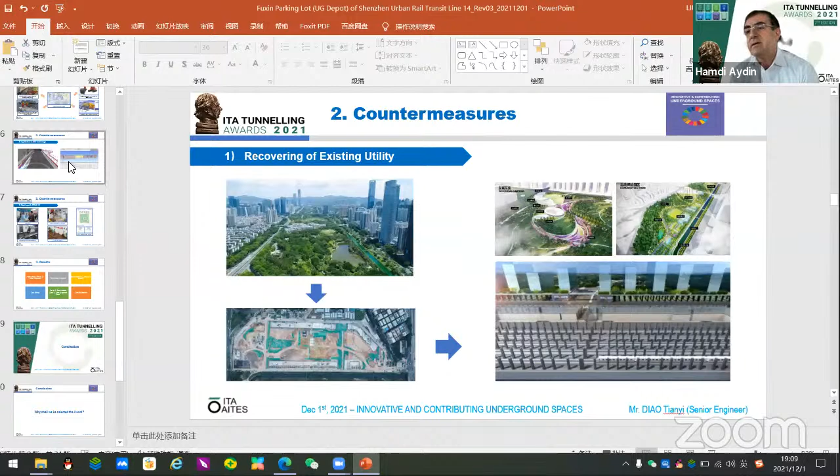And you said this is normal procedure, using BIM-based site construction management information technology. So what is the utilized BIM level here? In BIM 1, 2, 3, 4, 5, it goes up. Which level do you use there? BIM level.

Sorry, wait a second. Excuse me, actually I'm not an expert of BIM, but we did apply the BIM technology. We use this for the progress control and also just for the construction.

So you didn't consider the time and the budget, as I understood. Did you take into consideration the budget and the time? No, just the construction. Okay, thank you.

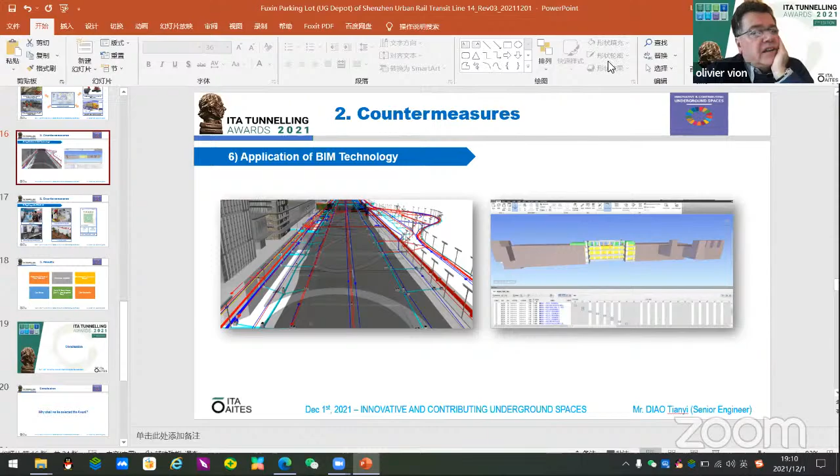I would have a question to Young because it's very impressive - I'm very interested by your cold drainage tunnel because it's something totally new, the first time I'm hearing about it. Normally here you are in a zone where it's frozen all the time, but the issue with building tunnels and having cars and so on is you need to prevent the heat from the operation of a tunnel from defreezing the terrain. Is this really the main challenge in your tunnel?

Yep. So because the temperature is very low in that area, a very distressed area - it's about 4,860 meters. You know that Qinghai-Tibet, that area is very cold all year round.